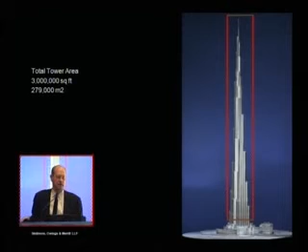The Burj Khalifa is around 3 million square feet, about 280,000 square meters in the tower, and a low rise of around 2 million square feet, for a total development of around 5 million square feet, which is a lot of area, but the area in the tower is really relatively modest. That 3 million square feet, or 280,000 square meters, is quite a bit less than, say, the towers of the World Trade Center, which were each around 360,000 square meters. The Sears Tower is around 400,000 square meters. So here's a building which is essentially twice as tall that was able to go with a lot less area.

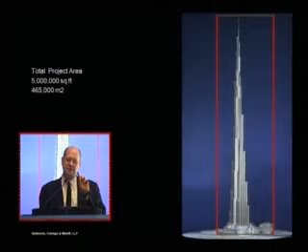And that's one of the reasons the building happened, okay. I'm going to talk a little bit later about why buildings don't get built, and one of the reasons buildings don't get built is they have too much area. Here's the usage of the Burj.

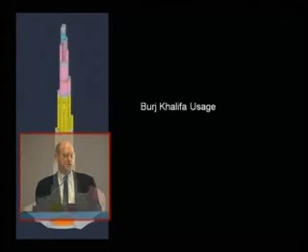At the very bottom, what's roughly a green color is an Armani hotel. It goes up to basically level 15, and it's Giorgio Armani's first branded hotel, and it's going to open next month, occupying the base. The blue, the kind of orange, and the yellow are residential floors, with different levels of quality and different ceiling heights as you go up, taking you from level 19 to 108. Now, what's kind of interesting about this building is the fact that it is mainly a residential tower.

If you went back to the mid-'80s, you'd say the world's tallest buildings are in North America, made of structural steel, and are office buildings. Now it's none of those things. It's not in North America, and the world's tallest buildings that will follow this one are most likely not in North America either. They're probably going to have a lot of concrete in them, and they very well might be residential, and that's one of the reasons I think this building happened—because it was a residential tower.

Anyway, those parts are for the financial stream. Those three zones, the blue, the orange, and the yellow, were sold in two nights. Back in 2004, there was an invitation-only auction, and basically these people who come are, of course, speculators—they're buying whole floors or multiple floors.

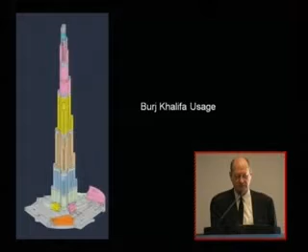And so that's how it would change. There's 37 floors up there, and in the middle of that zone, you'll see a little band, and that little band is where the observation deck is. The observation deck is not all the way to the top. At the very top, of course, you have mechanical systems and the like, and then above there is the spire. Here's the floor plate, okay?

It's a paradigm shift. It's residential. Here you have, if you go to the Sears Tower, at the base of the building, it's 22.5 meters from the core to the outside window. It's a huge distance. If you're sitting in that space, you don't really have a view, because the floor plate is so large. It's because of the nature of that structural system.

Here, you have this building where you have a very normal lease span like you'd have in any residential building, but it happens to be a building that happens to be twice as tall. If you go back to tall buildings in the past, you go back to the World Trade Center, you had a column every meter, and that column was 1/2 meter wide. So you're basically in a cage.

If you fast forward to the Aon building in Chicago, it used to be called the Standard Oil building, it was a 1.5 meter column every 3 meters. So still, it was quite dense, quite hard to see out. And you go here, here's a building where you have 9 meters clear. It's like any residential building, and so you're sitting there and you have great views, you can see out. So that's another part of this building we have.

I'll talk a little bit more about this later, but look at the very center. That center hexagon, I'll talk about that a bit. That's where all the elevators are for the entire building. There's 19 shafts, okay? But using sophisticated elevator technology, and Jim Fortune, somewhere floating around here, who's our elevator consultant, there was fairly sophisticated management technologies and shuttle elevators and double-deck elevators and the like. We were able to achieve that with just 19 shafts.

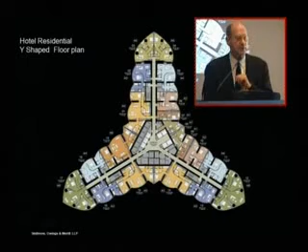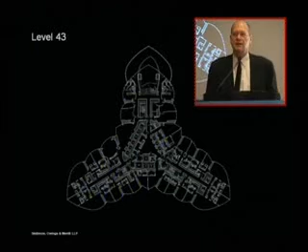Now as you go up the tower, what happens is the wings set back, they set back on a module. My firm is called Skidmore, Owings & Merrill. The letters are SOM, but that also stands for stay on module, okay? So it's a rigorous 9-meter module, and the setbacks come back in a very, very regular manner.

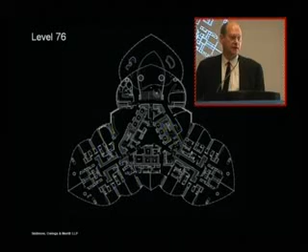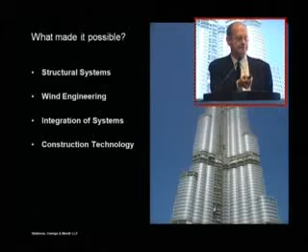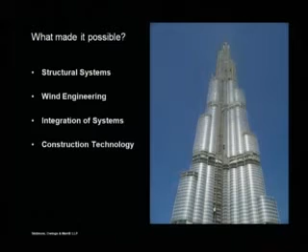Okay, what made it possible? I'm going to speak briefly about this. It's a technical challenge. An amazing number of people have drawn world's tallest buildings, and they just generally don't get built. And they're very beautiful drawings and very beautiful ideas. So what made this one possible? My impression is it's the structural system, it's the wind engineering, it's the integration of systems, and it's construction technology.

And by the way, after my talk later today, there's going to be a presentation by Ahmad Abdelrazaq of Samsung, who's standing over there against the wall. He's going to be speaking about some of the construction technology.

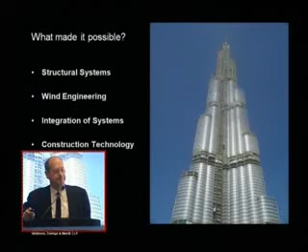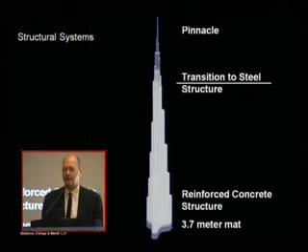So let me go through these a little bit. The building is basically reinforced concrete. At the very top, when the building gets very narrow, it goes to structural steel, but it's basically a reinforced concrete building. And it's a very simple system, very simple idea.

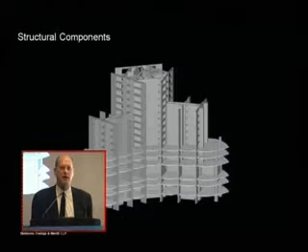It's made of very conventional pieces, just flat plate slabs, walls, and very few columns. And it took a long time to make it simple. There's an American author named Mark Twain who once wrote a letter to his friend, and the letter was rather long, and he said, 'I would have written a shorter letter if I had more time.' Okay, to make something simple is a tremendous amount of work, and a tremendous amount of work was put into this, trying to make it as simple as possible.

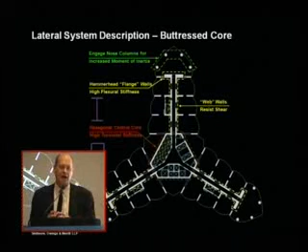As you look at it, in the very center, you see this hexagonal core where all the elevators are. That essentially acts like an axle. The last thing you want to have happen in a tall building, you don't want it twisting. There's a whole lot of reasons for that I can explain later, but that's something you don't want to do. So we created this essentially this pipe, this axle that goes up the building that keeps the building from twisting. But that by itself is much too slender to go to such great heights.

So what we did is we stiffened it by having walls going down the corridors, and then cross walls between the demising units, walls between units, all the way out. And because of that, we came up with a name. We call it a buttressed core. So it's basically this core that's buttressed by the three wings.

And if you look at the componentry, it's very, very common. You see off the side, there's a little diagram of a tube. That's like the axle. And then you see a little drawing of an I-beam or a wide flange beam. And that's how the wings work. It's like you took an I-beam and you welded it to a tube, and that's the system. And the I-beam essentially stiffens the center tube.

And the way we shape it, it's on this rigorous 9-meter module. It just keeps stepping back and back and back and that's how it shapes. One of my predecessors, who was a partner who kind of ran the group when I started, he's from India, his name was Hal Iyengar. Hal was in the office one day, he'd retired. I gave him a set of drawings to go over and bleed on it, get his red pen out and work over the drawings. And he came back and said, it shapes itself the same as Sears Tower.

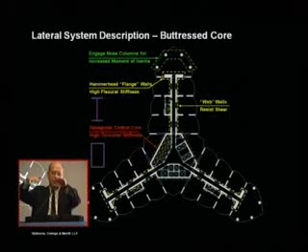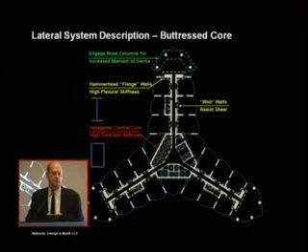It's a completely different structural system, but it shapes itself the way as Sears Tower. On Sears Tower, the way it shapes is you just stop building part of it. You stop building part of it, and originally there's 9 tubes, and then a couple of tubes fall off, and then a couple more, and then 3 fall off, and you're left with 2 tubes that go all the way to the top. And that's how this is. You essentially stop building part of it because of the architecture. There's a transition from maybe rectilinear elements to round elements, but that's basically how it goes up.

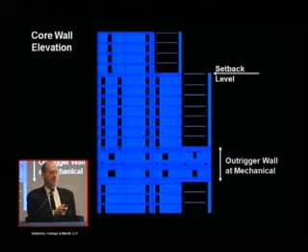Another very important thing in tall buildings is the management of gravity.

I stole David's water, I'll give it back to him in a minute. Anyway, I have 2 of these, one is full and one is partially empty, okay? And if I put them down here and I sort of try to knock them over, the one that's empty is easier to knock over than the one that's full, because I'm using the gravity load to help resist the wind forces.

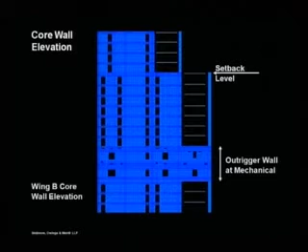Another thing, if you look at the bottom of your water bottle or your coffee cup or whatever, there's a rim at the edge. It's never flat at the bottom, because if you have a flat cup, it'll wobble on you. And so we need to learn from the guys who make these water containers. They put the support out at the edge, then you use the weight of the water to keep it up. Here's your water, Dave. Okay, anyway, and so that's what it is.

So we keep trying to push the load out. We keep trying to push the gravity load outward to stabilize it. If you were standing up and I was to push on you, you'd spread your feet out to be more stable, and that's really what we're trying to do.

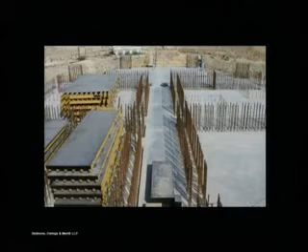At the bottom of the building, this is the reinforcing. If you look at it, it's very, very modest. It's like you might see in a 20-story building. That's because we have no uplift. We're able to, even if you take our wind forces, the factors of safety and the like—if you look at a storm that happens once in 1,700 years, there's no uplift. Okay?

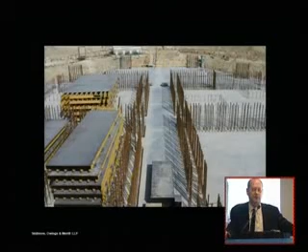It's because of that we're able to save a great deal on the reinforcing. If you talk about reinforced concrete, a lot of times the most expensive thing is the rebar. The second most expensive thing is the formwork. The cheapest stuff is concrete. So we try to minimize that.

Another thing you'll see in a minute is that through standardization, we were able to reuse the formwork essentially all the way up, because even though the floors keep changing, most of the portion of the floor doesn't change as it goes up.

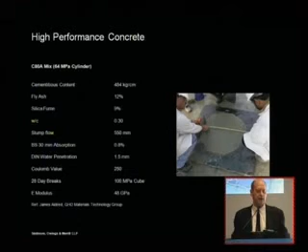There's a magic new material out there called concrete. It's not the same stuff our earlier generations worked with. The stuff you see on the sidewalk is also called concrete, but this stuff is magic. We have very, very high strength concrete, very stiff materials. We used to measure concrete workability in a slump; now we measure the diameter of the puddle. So you can really put this concrete in very tight pours.

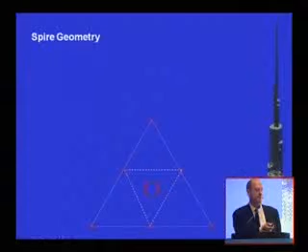It's a technology we picked up in Korea when we were working with Samsung on Tower Palace 3. The spire at the very top, the building set back so many times that we were no longer able to use the standardized formwork we'd started from the very base, and so at that point we transitioned into a steel structure.

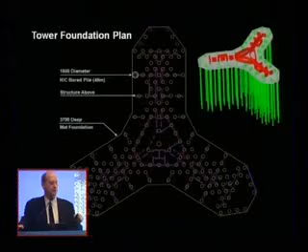At the very bottom of the building is a 3.7 meter raft or mat with 194 piles, meter-and-a-half diameter, going down into the ground. The settlements of the building are around 50 millimeters, about that far.

There was a tremendous amount of very sophisticated calculations done by various geotechnical engineers, and then there was a page-and-a-half hand calc done by Clyde Baker, who's a fairly famous geotechnical engineer in the United States, and he got the same answer, so we knew it was right.

You can see where the piles are. There's very, very few piles in the very middle of the building. That's because we're pushing the gravity load out.

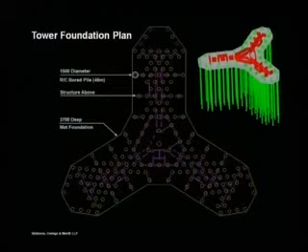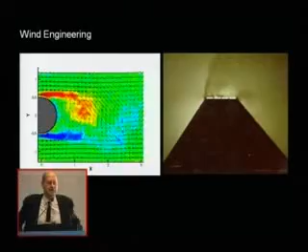If that matches the harmonics of the building, you'll have something kind of like a child on a swing. A building is an oscillator, a swing is an oscillator. If the child kicks their feet at the natural frequency of the swing, it goes very, very high. But if you as an adult tried to hold them up there, that's a lot of work. The child is able to do it with just their feet.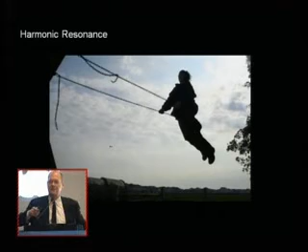It's not unlike the failure of the Tacoma Narrows Bridge. Everyone saw the pictures of the galloping bridge, the collapse. The wind was blowing sideways and the bridge was jumping up and down, going perpendicular to the wind. So this is the problem: how do we address this vortex shedding?

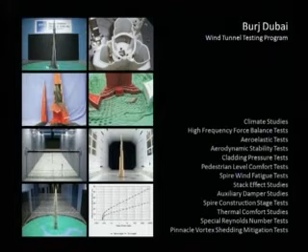Well, we did a whole lot of wind tunnel testing. Most of it was done at RWDI, and Peter Irwin's somewhere probably in the room. We also did a peer review with the University of Western Ontario boundary layer wind tunnel. So we did a tremendous amount of wind tunnel testing.

But first of all, you have to know what the heck the wind is. You get your data from the airport, and that data is taken 10 meters off the ground, but you're trying to figure out what the wind speeds are at 800 meters. So what do you do?

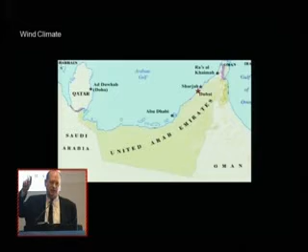Well, you turn to Peter and say, what do you do? So what Peter did was a whole series of climatic studies, looking at balloon data and the like, plus standard modeling tools to see what the velocity profiles were up high, and proved to ourselves that what we were assuming was conservative.

We interviewed for the project almost 7 years ago. On March 1st, I and two of my partners flew to New York to meet some guys from the Middle East who wanted to talk to us about a building. So it was March 1st, 2003.

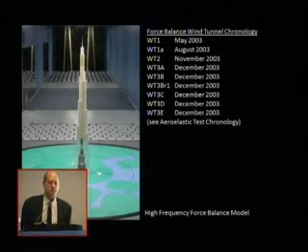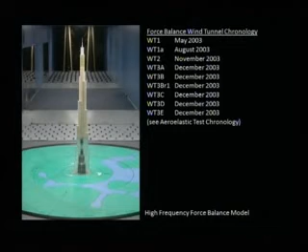We interviewed, had like a 2-week competition, and they selected us. We immediately went into the wind tunnel with our competition scheme. So you can see we interviewed on March 1st, and we were in the wind tunnel by May, just to see what the heck we had.

What we discovered is the building had this 3-wing floor plate, which is pretty common for residential towers. Lake Point Tower in Chicago has the same layout.

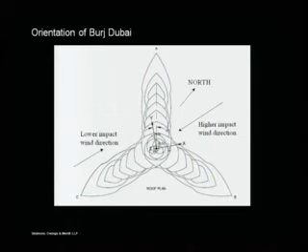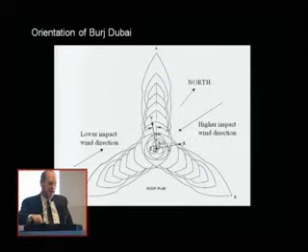If you go to Las Vegas, you'll see a lot of hotels have a Y-shaped plan. Well, we discovered there were 6 directions because of the setback irregularly. There were 3 noses, and in between the two noses, we call those tails. So it's got 6 directions, and as that goes up the building, it reshapes.

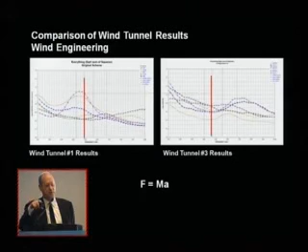If you look at the one on the left, this is our first wind tunnel test. The results were not good. If you look on the right, after our third wind tunnel test, with the bar there happens to be I think the 1,000-year wind, or maybe the 100-year wind. If you look at the dotted line going from one chart to the other, you can see how the forces drop. This is proportional to the forces.

We then later did a whole series of aeroelastic tests, which are very important because you pick up higher modes. We then tune these buildings using virtual work techniques. We can tune them like a musical instrument. We can play with the mode shapes and the periods.

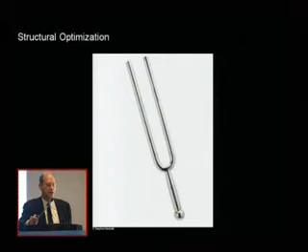This is where we ended up on the mode shapes, around 11 seconds. Ahmed said he's gotten some readings lately, and we're around 10.8 seconds. So our measured and calculated are very close. And this is what happened.

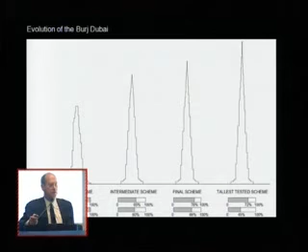Okay, look at this chart a little bit. The one on the left is what won the competition. It was 10 meters taller than Taipei 101. But we didn't want to promise more than we could deliver. So we went in there — they wanted the world's tallest building, and we gave them the world's tallest building, by 10 meters.

And we tested it, and the results came back very badly. If you look at the bottom of the chart, you'll see a base moment and an acceleration, and that's what we got from the first test. By the time we got to the final scheme, the building had grown 300 meters, 1,000 feet, and the forces had dropped and the accelerations had dropped through this wind engineering approach of actually designing the wind.

All those setbacks on the building — going back to the child — every time the width of the building changes or the shape of the floor changes, the rate of those vortices change. So instead of having a child with 2 feet kicking in unison, it's like having a child with 23 or 27 feet, kind of a scary idea, and each of those feet are kicking at a different rate. So the swing never goes anywhere, and the dynamics never go anywhere.

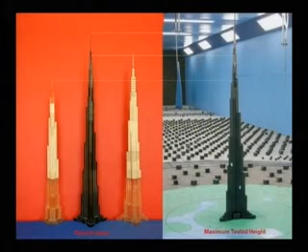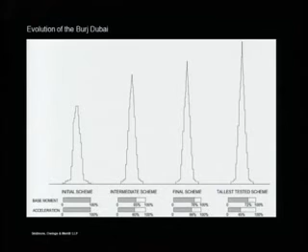We even tested one that's bigger than what got built — if you look at the one on the very right, you notice the moments and accelerations are less than the one we actually built. But some of the higher modes were worse, so we weren't able to build that.

Of course, integration of systems — these things are like Swiss watches. If you waste 1 square meter, you waste it 160 times. Everything had to be located and identified. Here's the core and the lift.

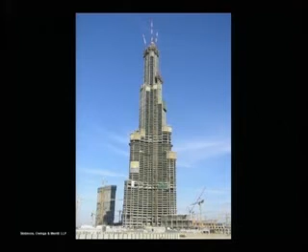Construction technology — it was simple elements, basically a vertical factory, and I'll leave it to Ahmed's session later; hopefully he'll talk a little about it. But basically, we were able to use the same formwork in the center of the building for 156 stories. These are the players involved, okay?

And here is the building, how it looks now. Now they washed the windows, looks pretty good. There's a sample of the window wall outside there. As it goes up, we had an opening on January 4th.

Here's the crowd. All the big shots sat in one place, and all the people who actually worked on the building had to sit off on the side.

And they announced the height. Okay, now I knew what the height was, so I wasn't surprised by that. But then they changed the name, and they didn't tell me.

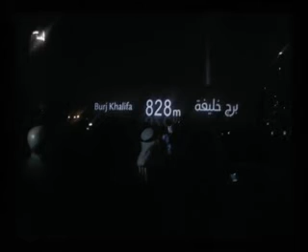So I was sitting next to a guy who spoke Arabic — since it was all done in Arabic — I said, 'What just happened?' And he explained it to me. Something about... anyway, so there were fireworks on the ground. There are these giant fountains around the base, kind of like the Bellagio in Las Vegas fountains going up. There's more fireworks, then fireworks going off the side of the building. And I'm sitting there as a structural engineer saying, is this really a good idea?

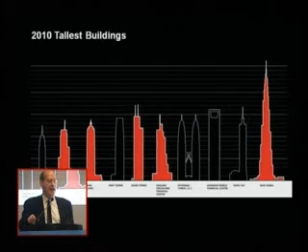But they had firefighters at each of the locations. And so there it is, finished, and it's a lot taller than number 2 — roughly 300 meters taller than the second highest.

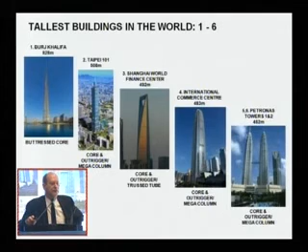So where are we going to go from here? Here's a look at the 12 tallest buildings in the world that have either opened or topped out. They all have different structural systems, or not all of them — there's a lot of core and outrigger systems. There's a few that are different. The Burj is a bit different. And so let's think about those.

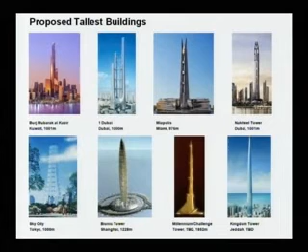Let's think about what's next. I got this from some website. There's still a bunch of buildings out there in the press saying they're going to be the next proposed supertalls. But there's been so many proposed in the past, and virtually all of them don't get built, maybe one or two. Why don't they get built? This is a very important question, and this is why I think they don't get built.

I think they're too complicated, too complex, too difficult to construct. There's no one simple, clear idea. One of the things we try to do when we create a new structural system is give it a name. If you can give it a really short name, maybe you have a really clear idea.

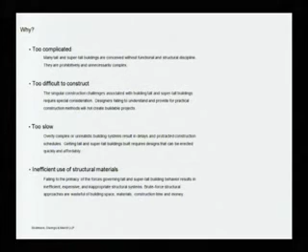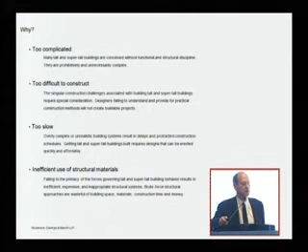It's too difficult to construct. It takes too long to build, too slow. Time is your enemy. You've got to get in there, build it fast, and get on with your life. And too inefficient, they're just too wasteful of materials. Too much structure, too many cubic meters of concrete, too many pounds of steel.

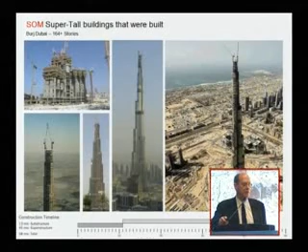We've been fortunate we've been able to get a few built. Here's what I think is important: speed. Samsung showed up on site in the spring of 2005, and they topped out a year later. That structure went very, very quick. Here you see the construction schedule.

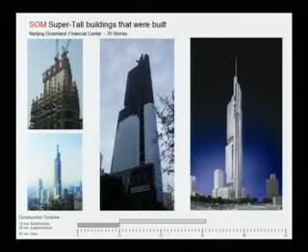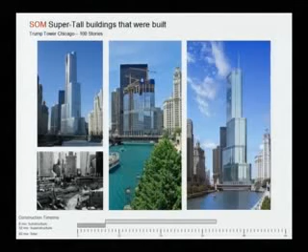You look at it, here's another building slightly taller than Sears, 36 months. Sears itself, slightly more than 36 months. Jin Mao, once again about 3 years. And Trump Tower in Chicago, which we just finished, went pretty close. So this is the kind of time frame you need to be in. Hancock went very fast, even though they had a hiatus because of a construction problem at the foundations.

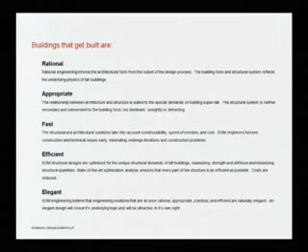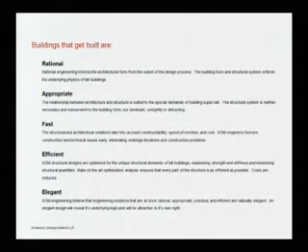So I think if you're a building that's going to get built, it's got to be rational. You've got to have a rational idea. It has to be appropriate. It has to be fast to build. It needs to be efficient, not wasteful of materials. And that's kind of an ethical thing, in my opinion. You just shouldn't be wasting your resources. And if it's not elegant, no one's going to want to pay for it either.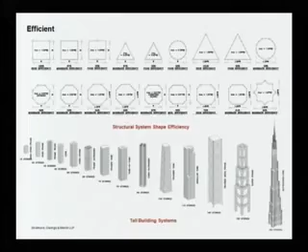So here's what I mean by rational, appropriate, fast, efficient, elegant. One more point I want to talk about is scale. Limitations of scale: you cannot take an existing building and make it bigger. You've got to come up with something new.

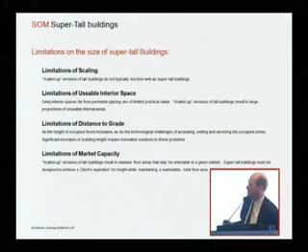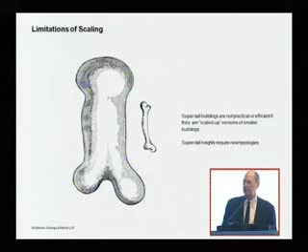And limitations of scaling relate to the things you see here. There's issues with too much space, issues of being too far from the ground, issues of a limit of market capacity. Galileo did a famous study of scale. He looked at why the bone of a dinosaur is different in proportions than the bones of a bird. It's because of scale. If I were twice as tall, I'd be twice as thick, twice as wide, and I'd weigh 8 times as much—not twice as much, 8 times as much. My proportions would be very different.

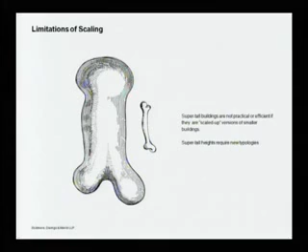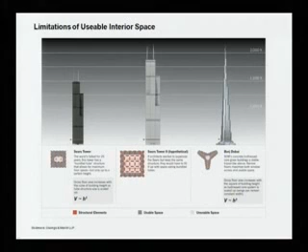And so as you go into these supertall buildings, you have to recognize that. If the Sears Tower were scaled up to 2,000 feet, or 610 meters, I think the area in it more than doubles, almost triples, because it scales by the cube, just like I would. The Burj actually scales by the square, which is kind of an interesting thing. If you made it twice as big, it's only 4 times as much area.

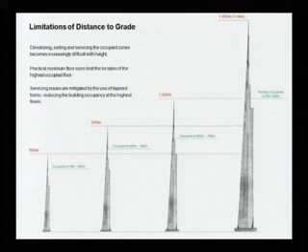Issues of scale: here I use as an image Frank Lloyd Wright's Mile High Tower. I'm not sure one actually needs a Mile High Tower. This one here is essentially about the same height as the Burj, so you can get an idea how big Mile High would be. And a lot of times you're just pretty darn far from grade—it's going to take you a while to get up there.

There's issues of elevatoring, market capacity. I can't remember—I think the amount of square footage in Frank Lloyd Wright's Mile High Tower was unbelievable. The market could never absorb it. I think it's hard to get the market to absorb a building that's more than, say, 400,000 square meters. It's just too big for the market to absorb.

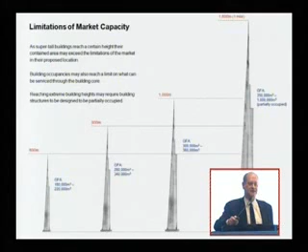So what's the next stop? I bet it's a kilometer. I hope someone does it soon. It'd be sad if the world's tallest building stopped with the Burj. I hope someone else has a dream that's bigger than ours and they actually get out there and realize it. With that, thank you.